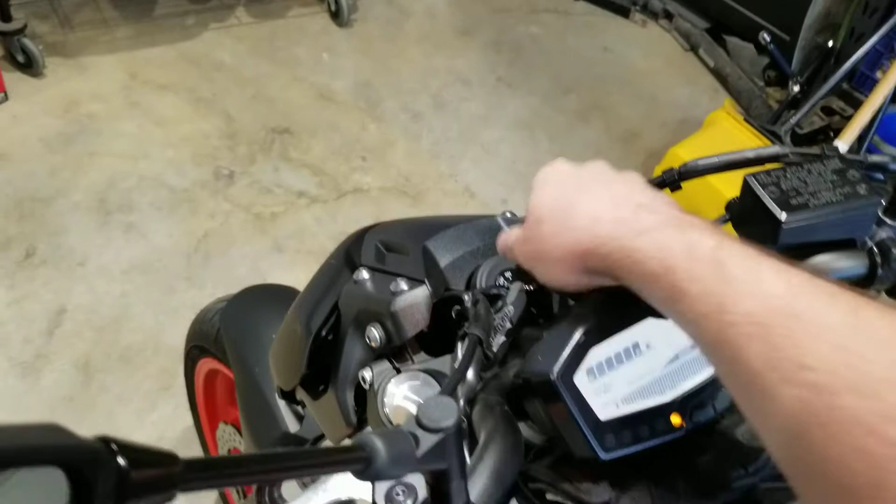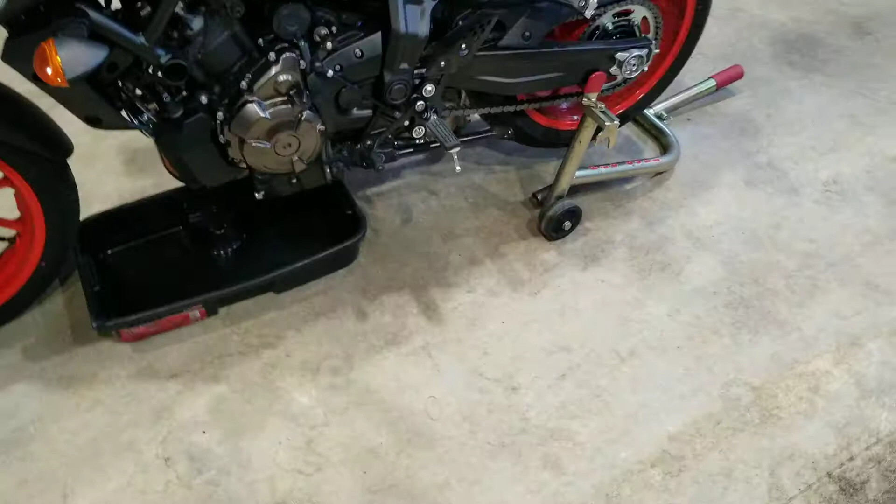Alright, it's time for the first oil change on the bike. In the past week or so, got 598 miles on the new FZ. So I'm going to do that chain adjustment today, but first, for this oil change, you don't need a stand for this procedure. I like to put it up there just to keep the bike level. It's just OCD preference. Got the bike up just on the rear stand.

Some of the things you may need. Channel locks, hopefully not. I use that just for the old filter. I know some may cringe at that. Torque wrench for putting the new filter on. I have a K&N 204-1. I think there's a C on it on the part number online. I know some people say they've had failures with K&N oil filters and things like that. I've never had a problem, knock on wood, but that's the filters I like to run.

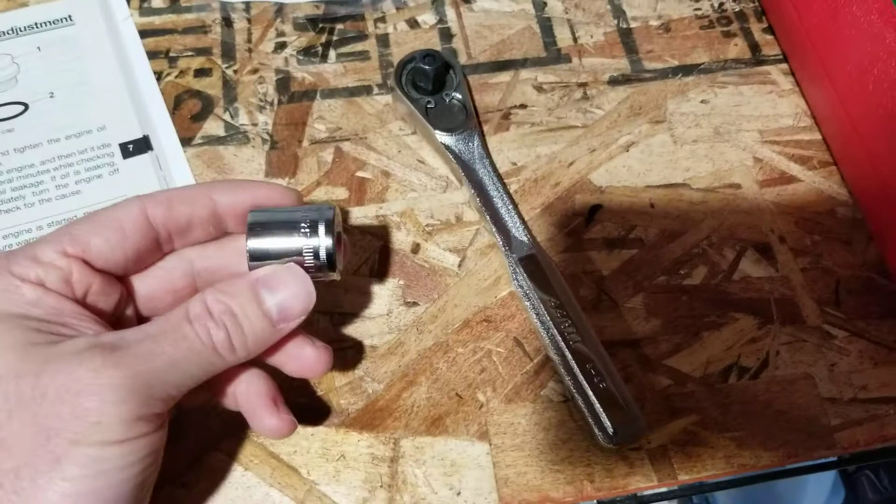I have an OEM crush washer, 3/8 inch ratchet with a 17mm socket. That'll be good for getting the oil drain plug off and on, and then also putting the new K&N filter on if that's what you're running. Got the little booklet here that came with the bike. Got some gloves, and let's get to it.

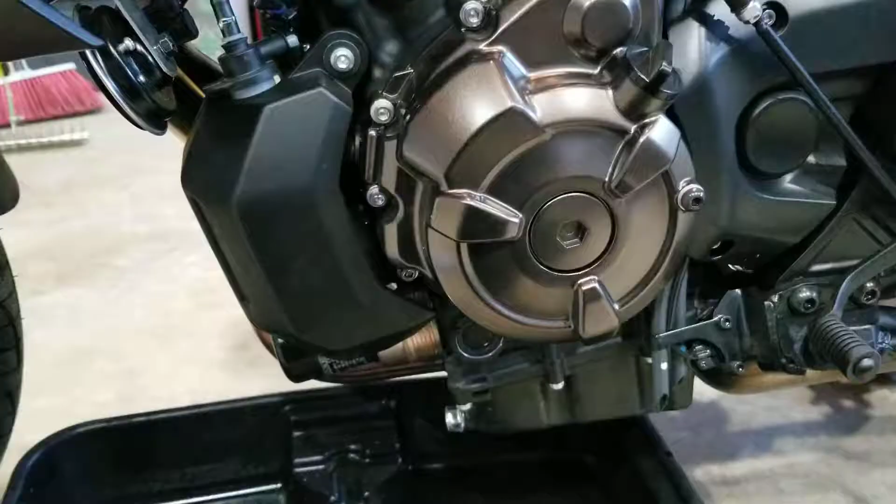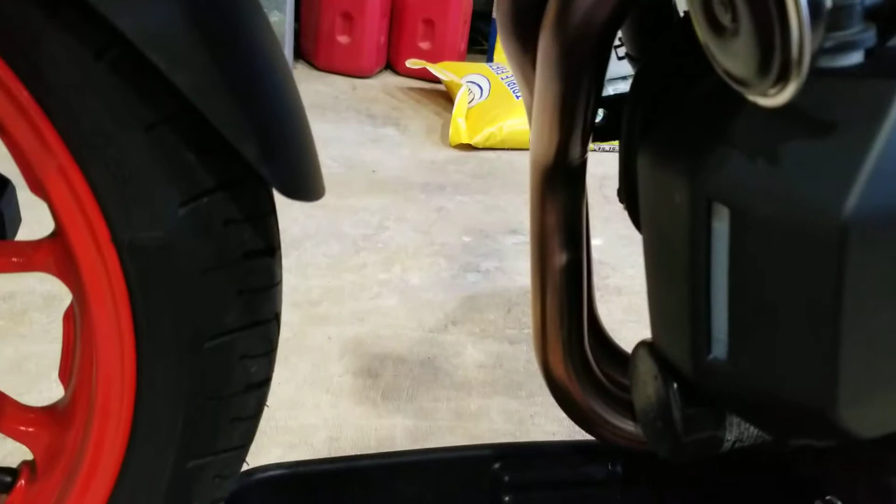Alright, so just as with all of the other 3 million how to change oil videos on YouTube, I want to make sure your bike is warm. I just rode home 35 minutes, so the bike's nice and hot. Let's see if we can't get this open. Oh, okay. So here's your oil filler cap. Put that down in a clean place. Then you can move on down here. This is your oil drain bolt here.

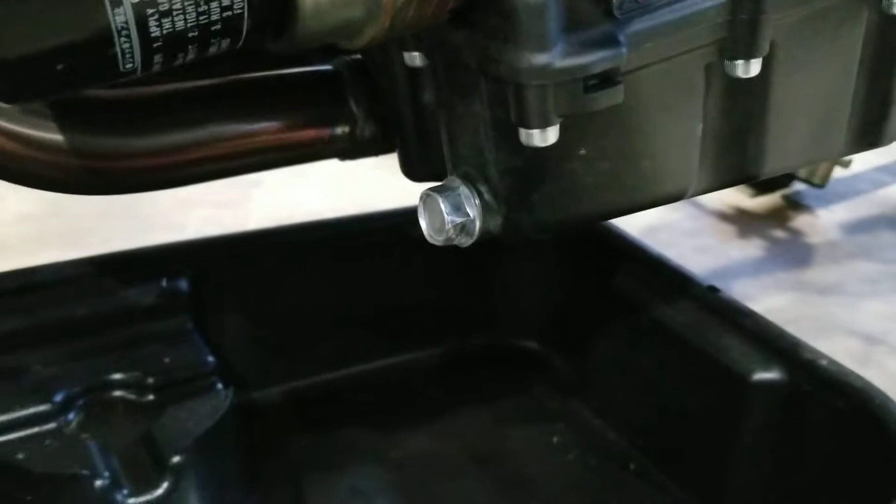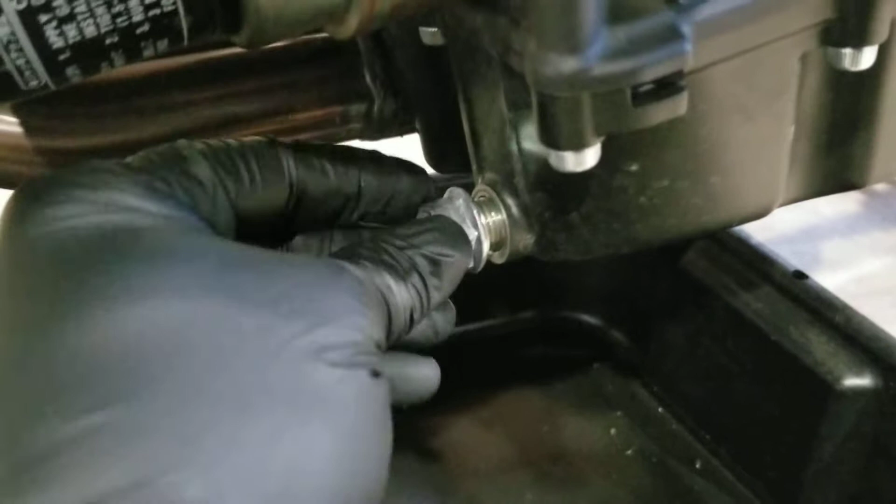Voila. Off camera, I just broke it loose real quick. That little 3/8 ratchet that I had was not doing it. I actually had to break out the breaker bar, and I'm sure it was well past torque, but man, that thing was on there tight. So it might take a little bit of wrenching. It's from the factory like that. But after you break it loose, just go ahead and untwist that. If you hold a little pressure, kind of pushing it back that way as you're threading it out, it might make this next step a little bit easier. Careful, it also is pretty warm.

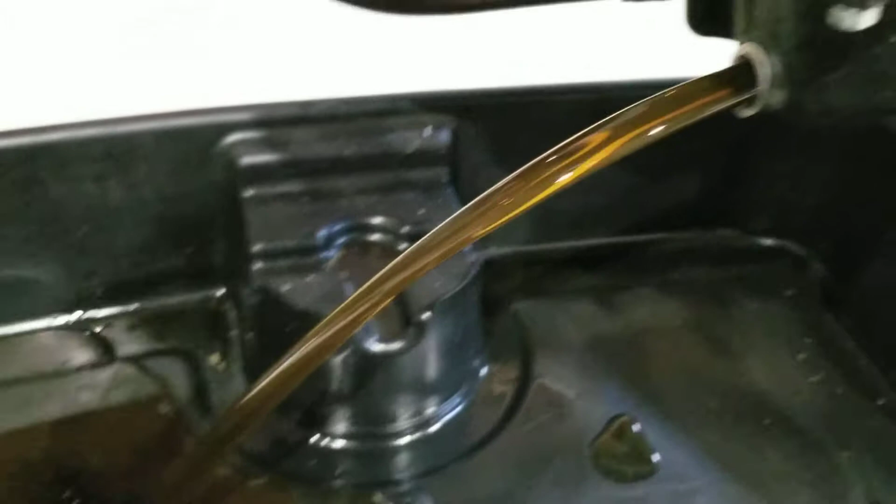So, you got a couple of drips there, and since this is the first change, looking for just the consistency and any particles and things that come out of the oil, just for my own knowledge. Probably not a whole lot to do about it just yet, but still holding a little rearward pressure on it. Once I feel it kind of bouncing off the bottom threads there, just like that, got it real quick pulled away. And all right, we got the pan in the right place. It didn't shoot out all over the garage floor.

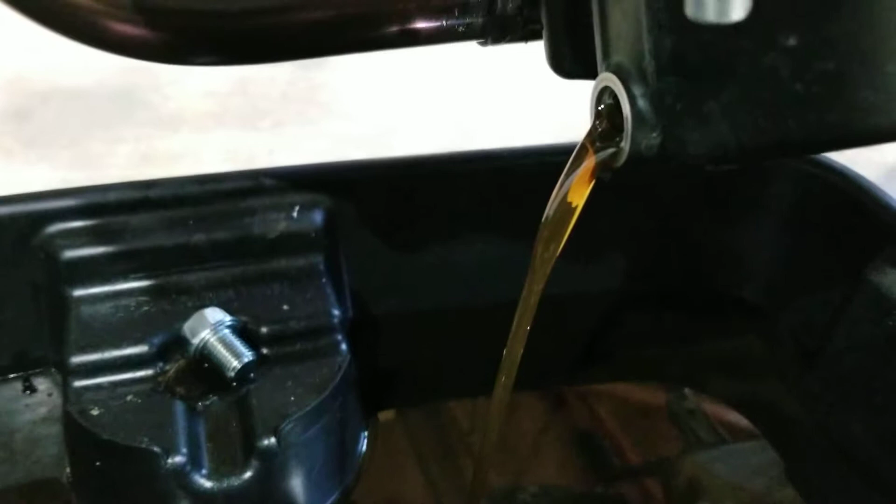So, looks pretty good. I mean, it's only 600 mile oil, but being the first one, it doesn't look like there's any big chunks of anything coming out. Which I would hope not. It's a brand new bike, but I'm sure it's happened. So, gonna do that and get to this next step on removing the filter.

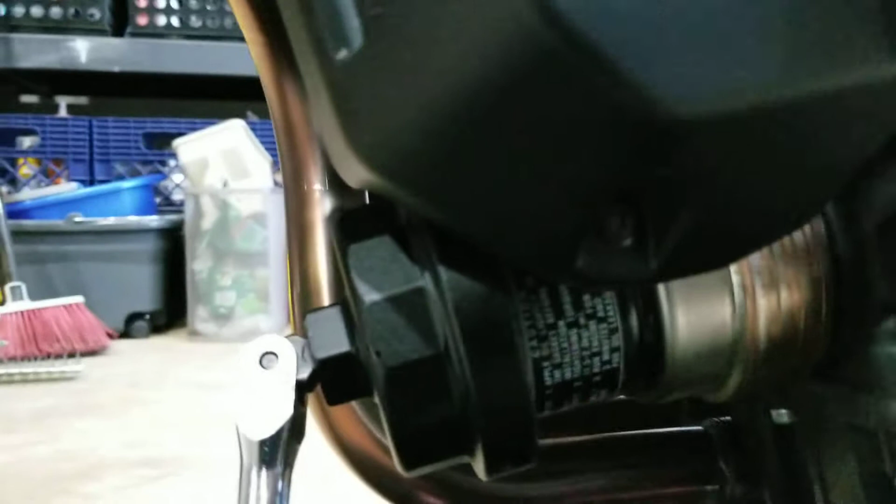Alright, so off camera, I tried to use just brute strength and my hands to break that filter loose, but apparently I'm just not strong enough. So I do have a pair of channel locks that we might try, but I think this oil filter cap wrench is off of an old Tundra that I had, so we'll see if we can't turn it. And oh, thank goodness. There's all kinds of tricks for getting stuck filters off, but thankfully that one just worked. So, come on.

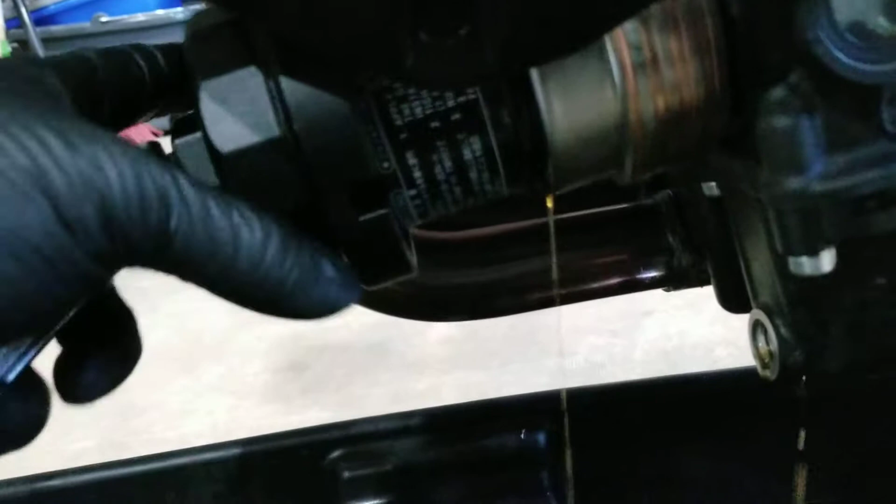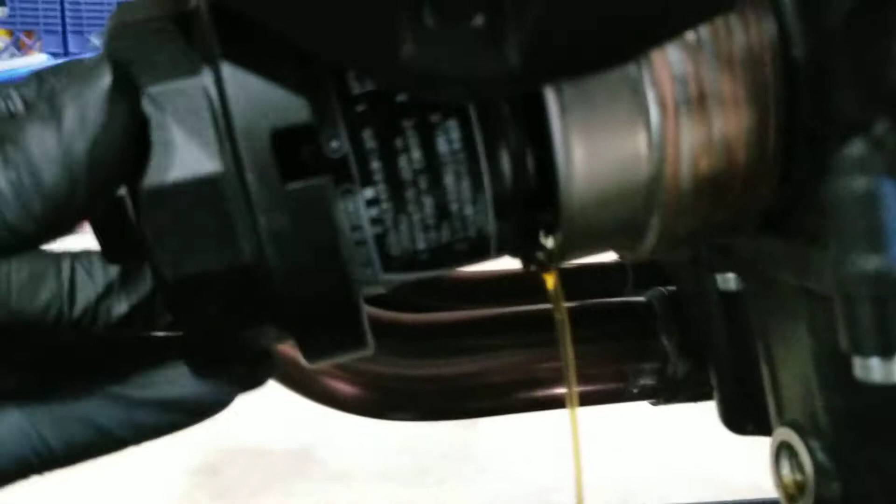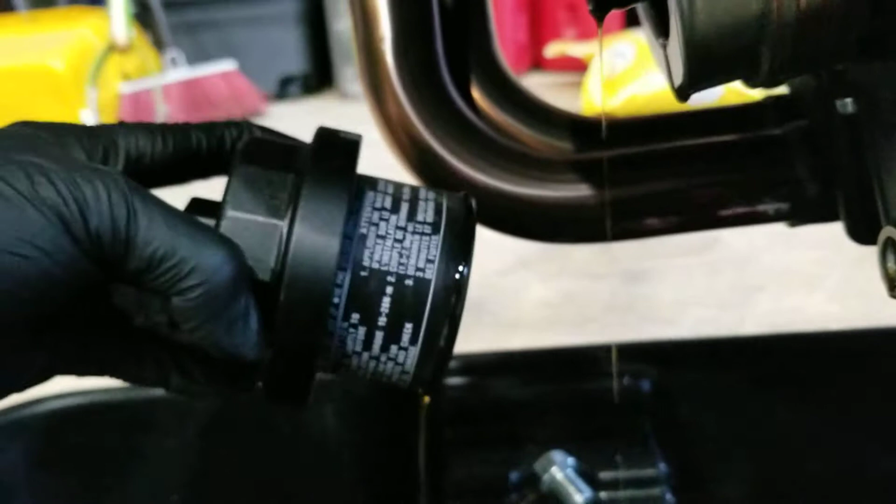So again, let's see if we can't focus this a little bit better. Just like with the oil drain plug, as you're unscrewing it, these filters usually have quite a few threads, or finely threaded. If you just hold a little bit of rearward pressure and let it drain a little bit. And you still have more in the filter as well. So we'll just stack that there for right meow.

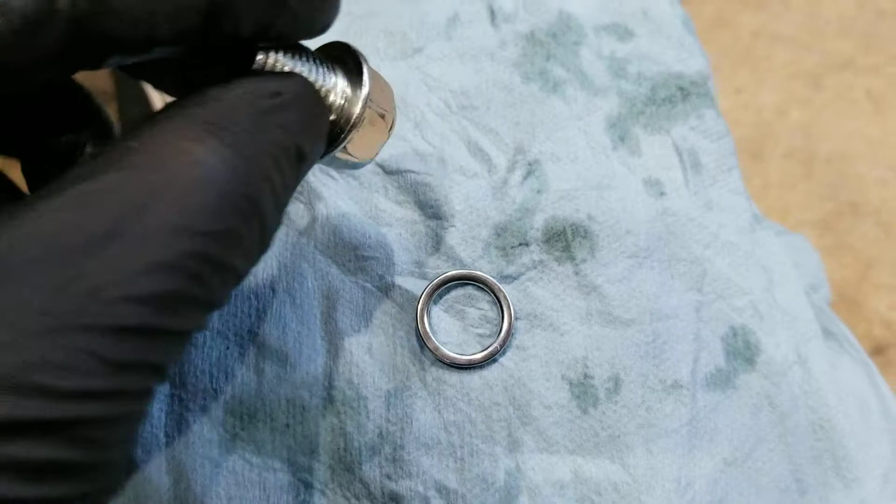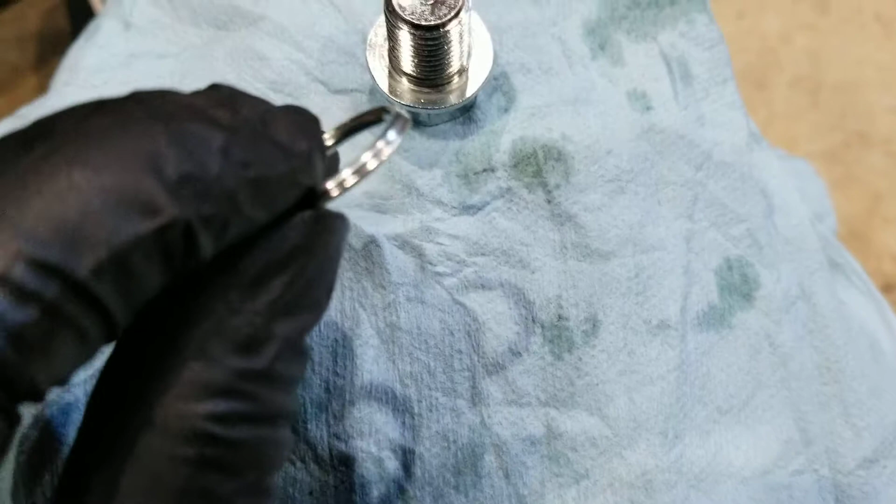Alright, so as that oil is finishing draining out, just be patient with it. Give it 5-10 minutes and try to get as much of that old oil out as you can. In the meantime, I like to go ahead and take my oil drain bolt, dry it off, clean it up, make things nice and shiny before you put it back together. I've already taken off the old crush washer, but as you'll see, there's two different sides. There's one that has a profile to it, some little ridges and whatnot, and the other side is smooth.

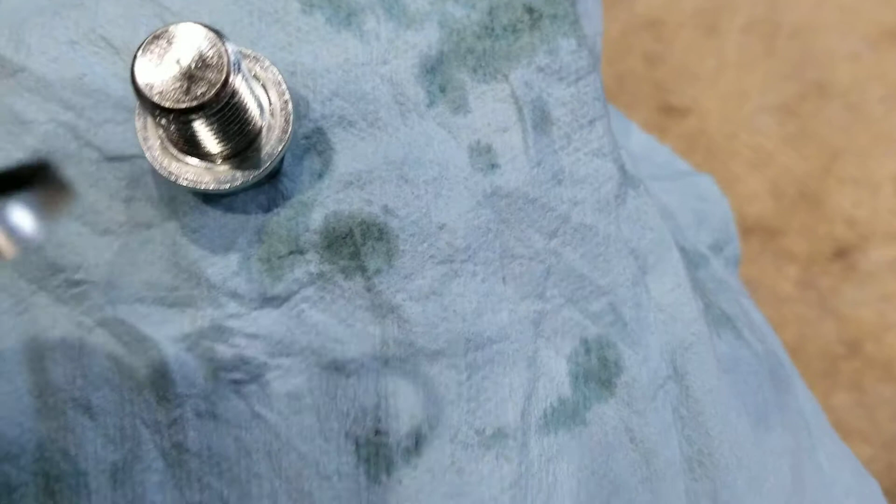The smooth side goes against the oil pan. So I'll go ahead and place that with the side that has the profile facing, oh wait, hang on, scratch that. So the side that gets crushed, the side that has the profile, goes down against the face of the bolt, so that the smooth side is going up against the oil pan here. So I'll just go ahead, let's try pointing it up just a little bit. I have a knack for cross-threading things, so I'll spin it counterclockwise until I feel it seat.

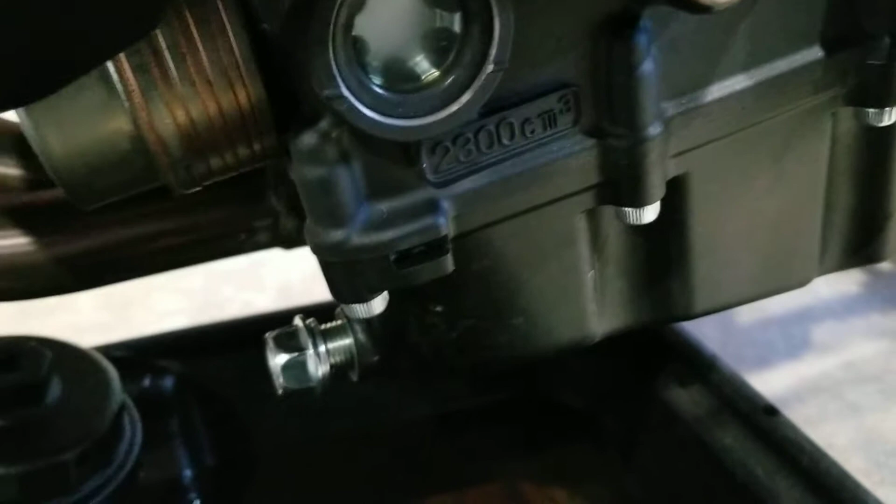And then I'll go ahead and start to thread it in. Before I go much further, I'm pretty OCD about making sure things are clean as you're going back in. So I'll start to clean this up just around here, so I have good clean surfaces between everything. And I dunked my towel in the oil. So I'll just go ahead and finish threading that in. I'm going to come back in just a minute and torque that down.

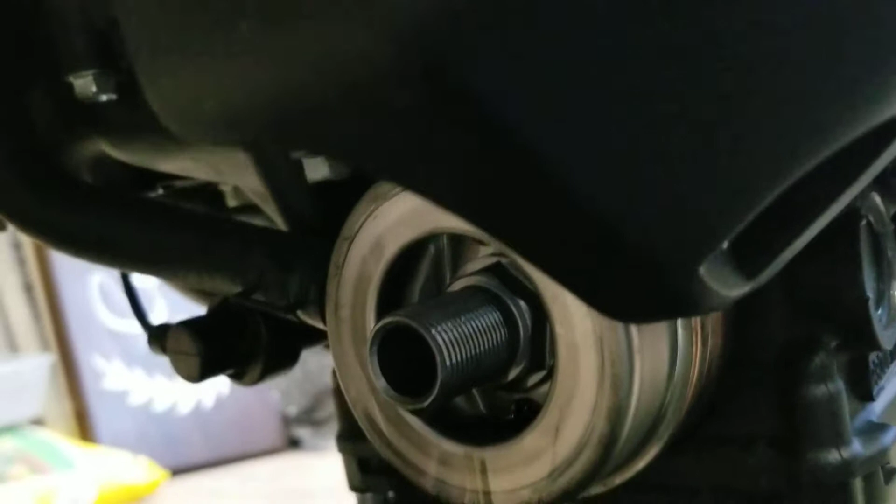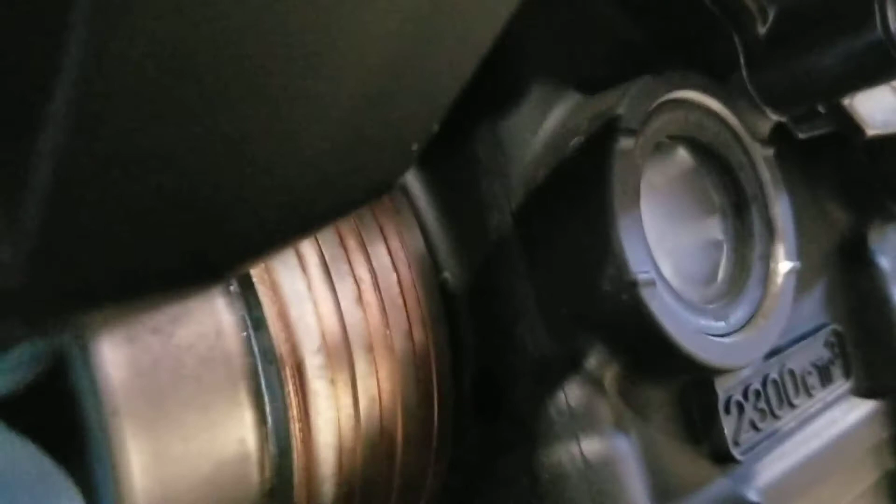Alright, so in preparation for the new filter, again, I just like to take my shop towel, clean up the mating surface there between the filter and the engine. Apparently I'm not very coordinated. Just like to clean it up, make sure everything's nice and clean. Get clean mating surfaces for everything. Looks pretty good there, I'm happy with that.

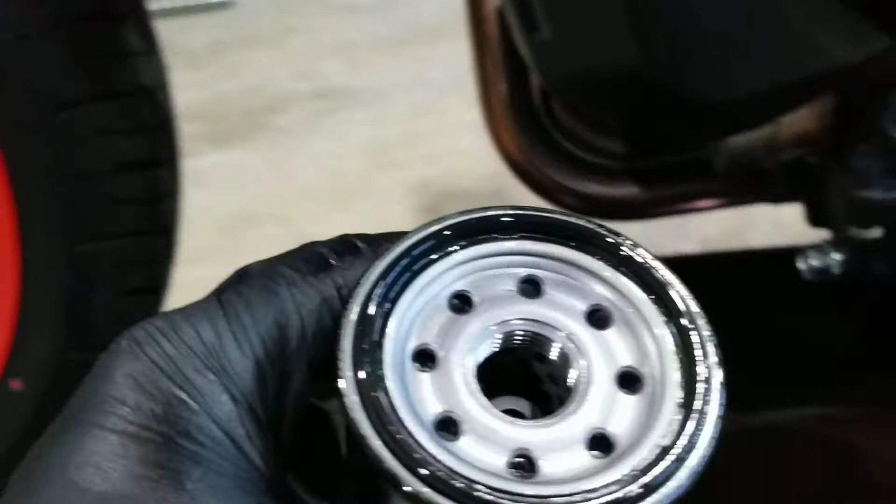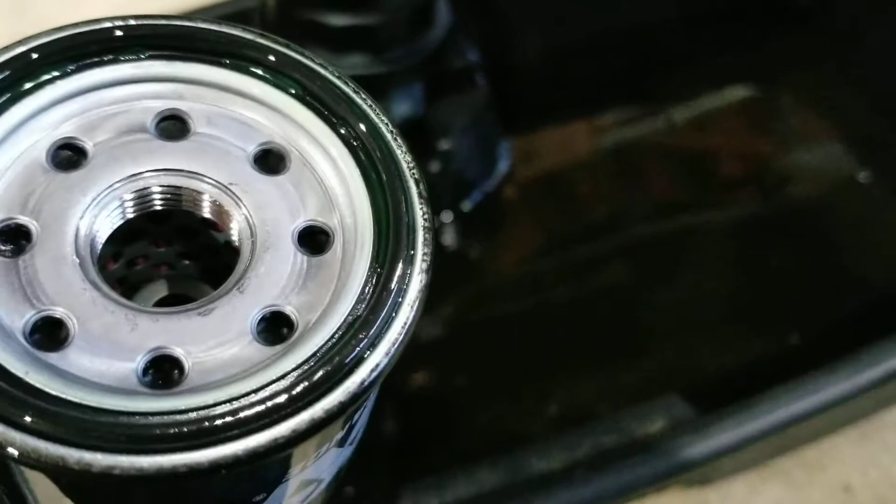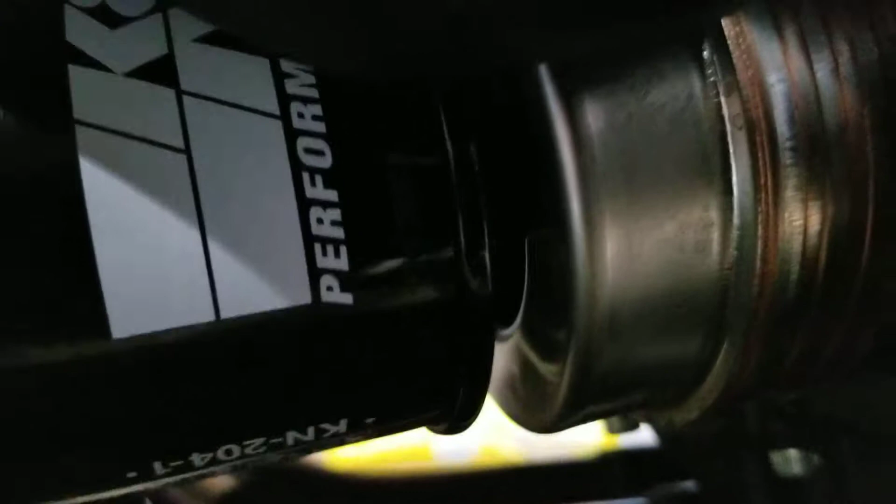Got my new filter here. I put a little bit of the new engine oil on the gasket. Some people just take a dip out of the old oil there, but I've got the new oil here, so a little bit of oil on the gasket there. And again, just to avoid cross-threading things, I turn it counterclockwise a little bit until I feel it seat, and then I'll go ahead and spin it the rest of the way on. Voila.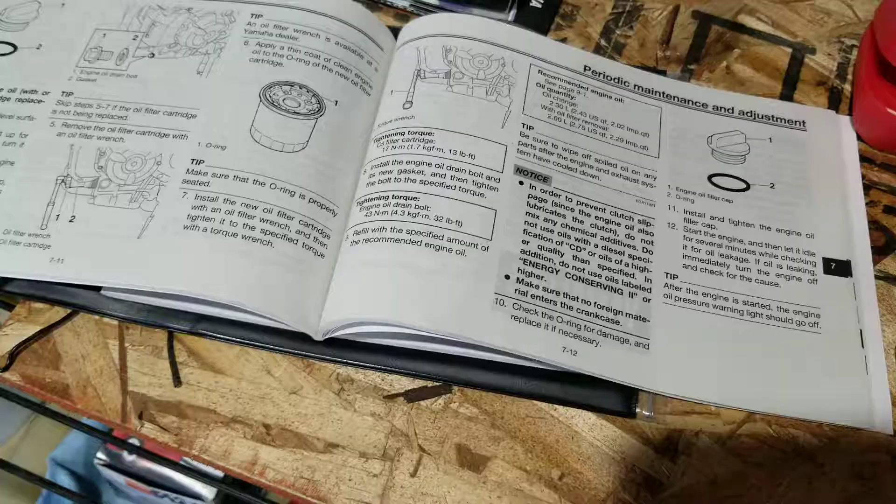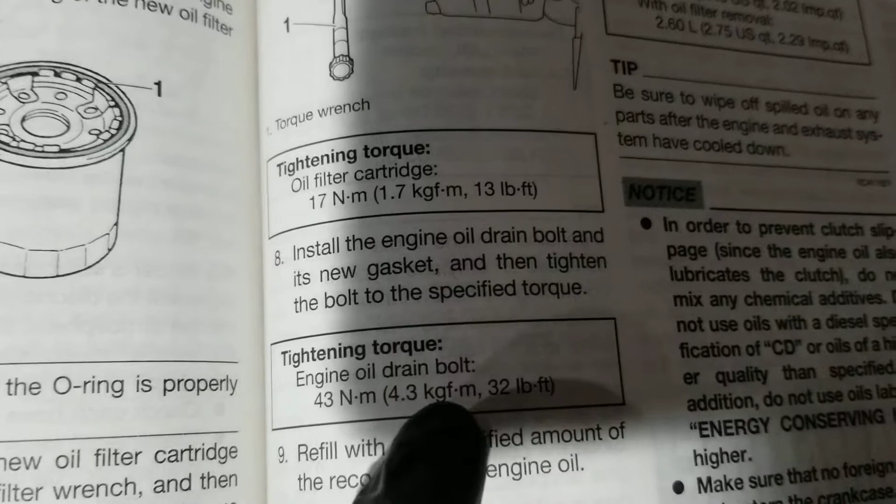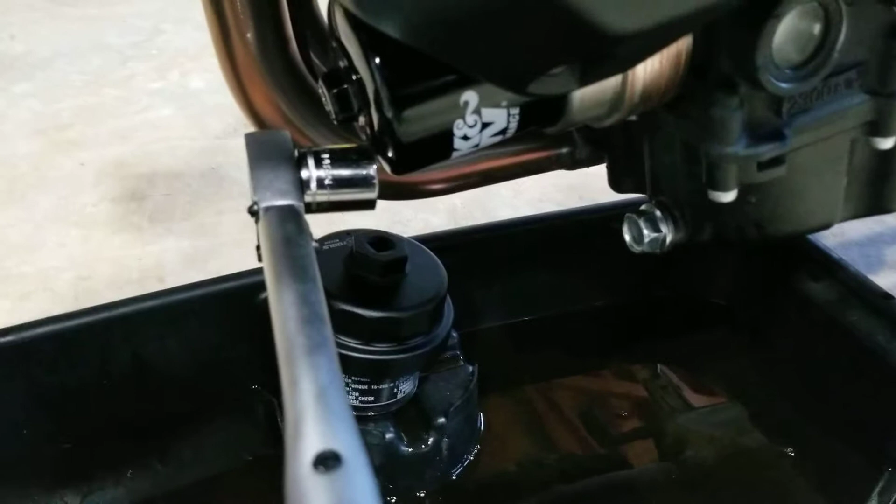Now it's time for our handy dandy torque wrench. It looks like we've got on the oil filter 13 pound-feet, and for the engine oil drain bolt it's 32 pound-feet. So doesn't matter which one you do, just make sure you get the right values on the right component. So 13 pound-feet for the cartridge, the oil filter, and 32 pound-feet for the oil drain bolt.

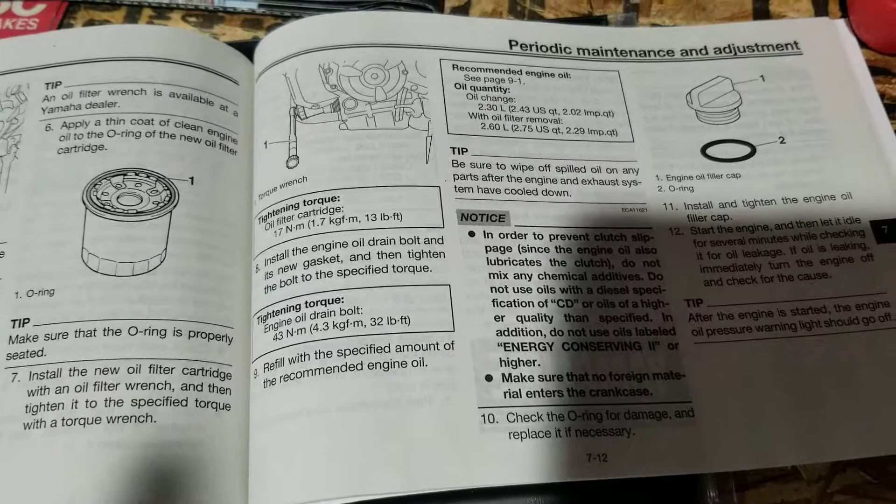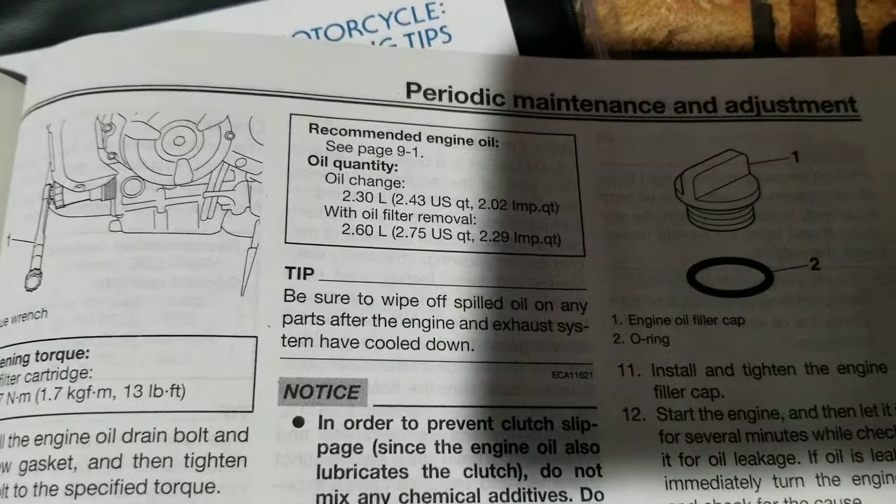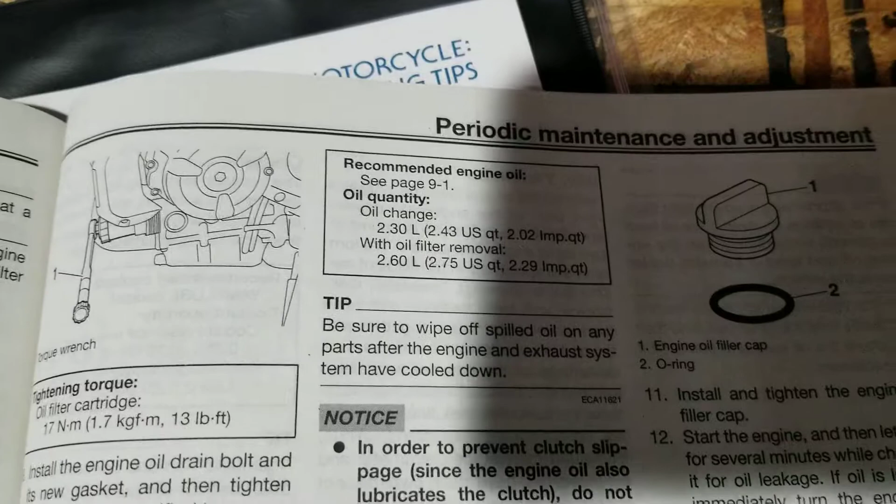Alright, so you're almost there. We've torqued down the engine oil drain bolt, torqued down the engine oil filter. Now it's time to fill it up. Gives you two different quantities here. They give you a quantity of oil if you don't change the filter. My personal thing is I always just change the filter when I'm doing the oil. The K&N filter, even the fancy one, it's $8, $9, something like that. So we'll be using the other value here, which is 2.6 liters with oil filter removal.

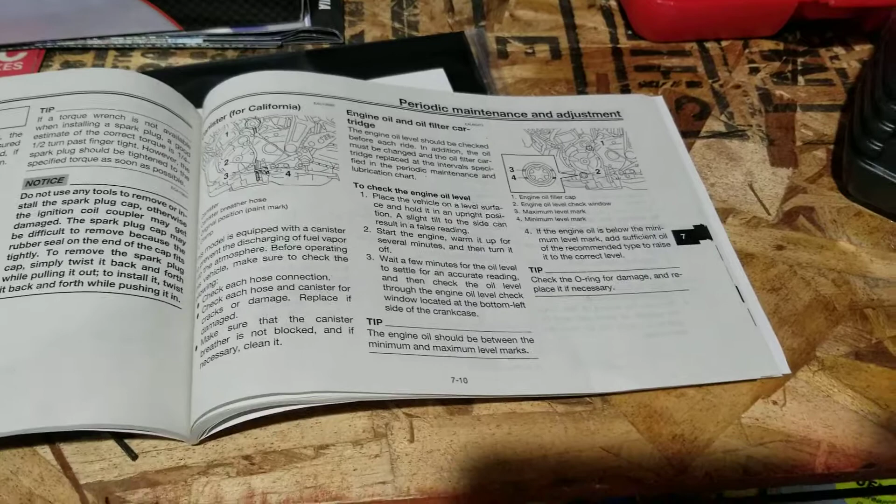There's another chart, is it next page? Somewhere in here. It'll tell you the different types, weights of oils that you can use based off of the temperatures that you're normally riding in. For me and my use, I'll be using the 10W40. Probably waste money on this green stuff, but it makes me feel better about myself.

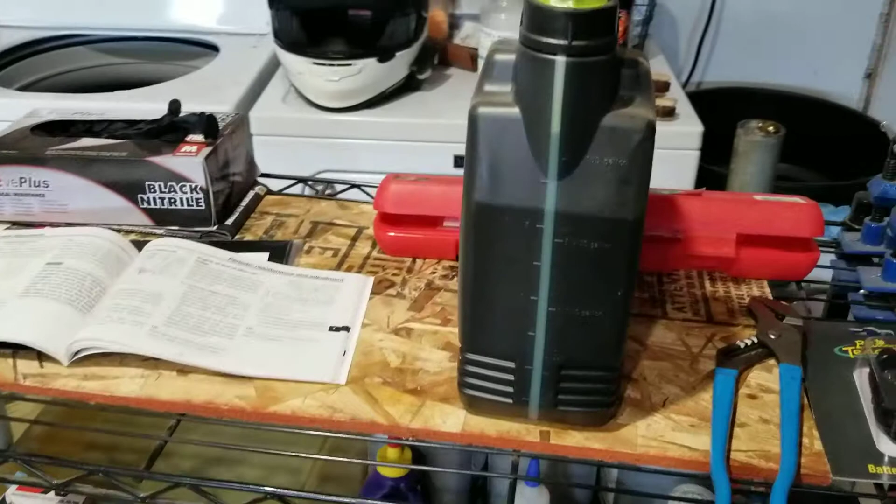So on here, since we're doing 2.6 liters, I'll probably back up a little bit. Probably start with 2.5 liters, start it up, see where we're at, get the bike back on the ground and sit up, and start with that. I cannot hold up the funnel and pour this at the same time, so I'll be back in just a moment. All right, so we got our 2.5 liters in.

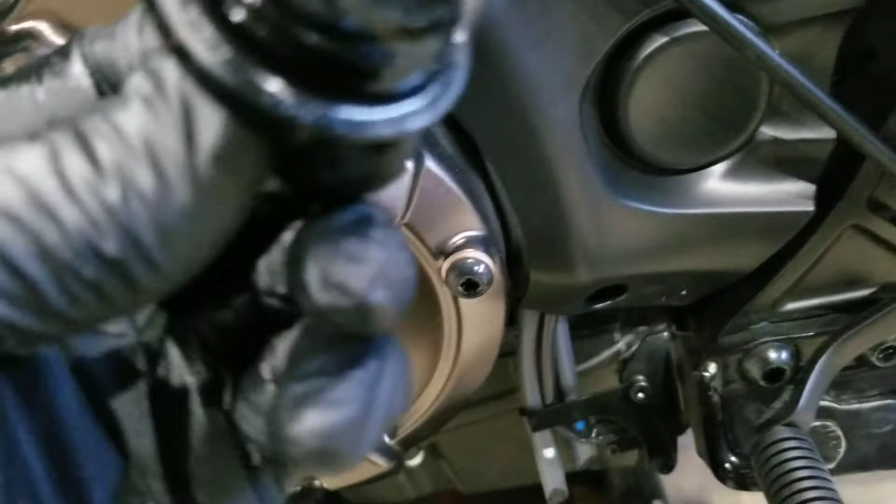And just like with everything else, the name of the game anytime you work on your bike is cleanliness. So again, just a little shop towel, making sure our surfaces are clean, not introducing too much extra bad stuff in there. We've got an intact O-ring still here on our filler cap. I've never had to replace one on the bikes that I've had, but hey, this might be the time. So let's lightly seat that for now.

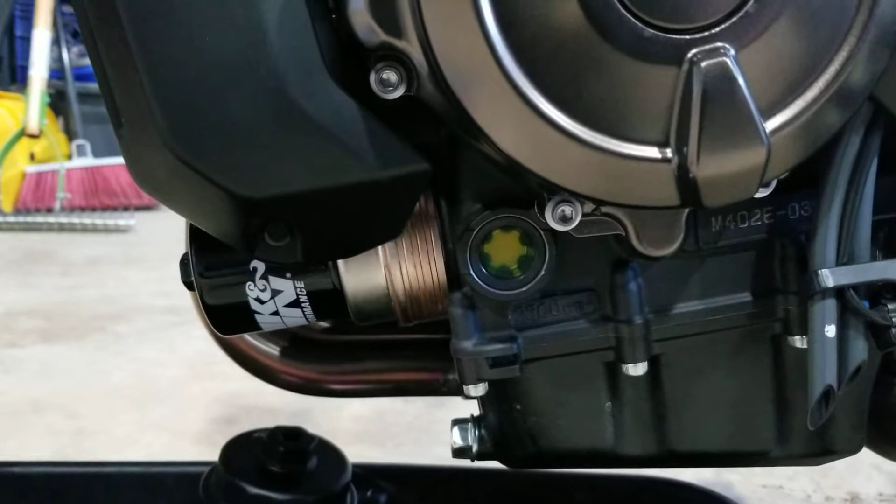Got our oil window, which up here is full right now. We're going to go ahead and start up this bike, let it run for a few minutes, get the engine warm again. That window will probably drop just a little bit as the oil starts circulating through the engine, and I'm looking for any leaks around the oil drain bolt and the filter there. So be right back.

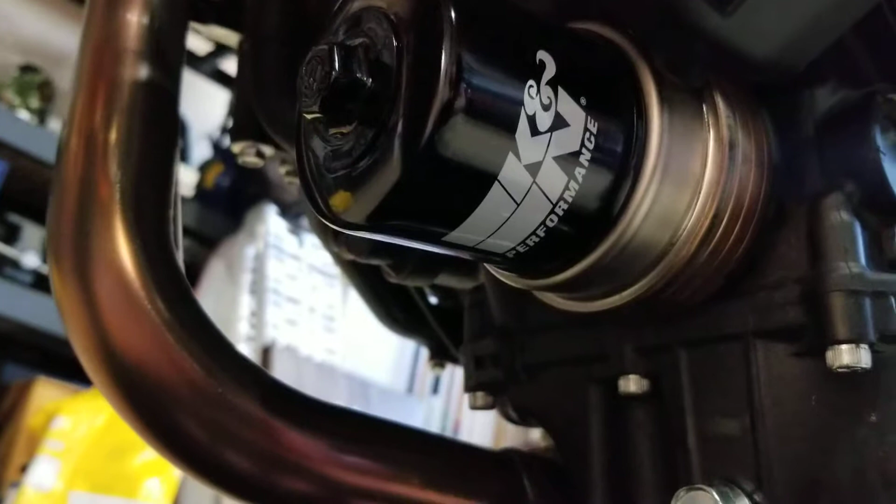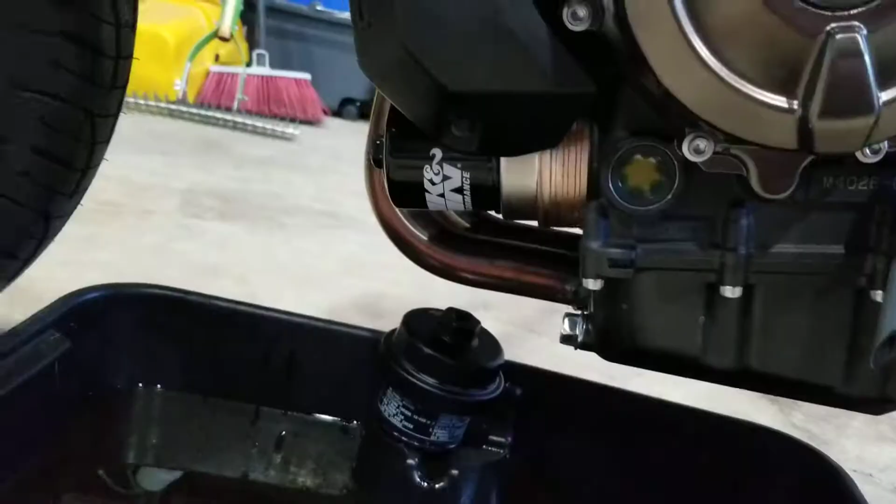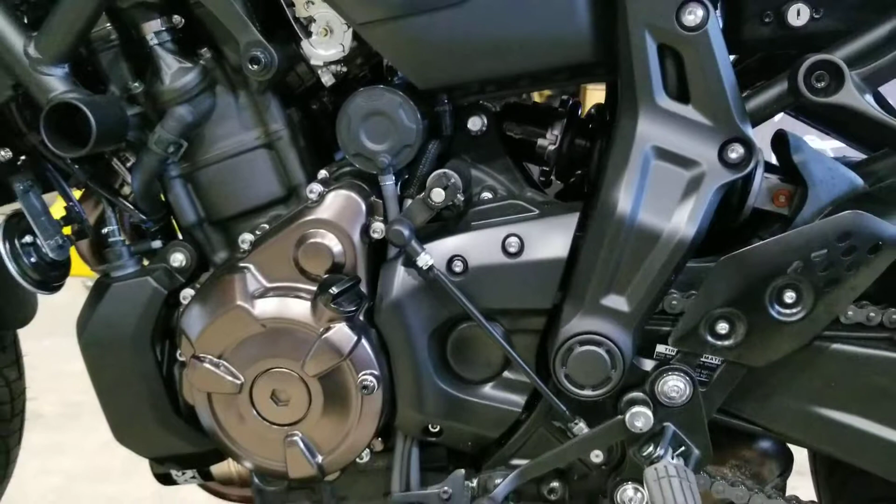Alright, so the bike's been off for about 4 or 5 minutes now, and even going 1/10 of a liter less than what it recommends, we're just about at the upper limit of the oil line here in the oil window. So I'm going to leave it like that for now, and keep that in mind for next time. Maybe put even just a touch less, but I'm happy with that. There were no leaks, no nothing else. So that's pretty much your first oil change right there.

If you've got an AutoZone or something near you, they'll usually do free oil recycling. So every time I go to get oil for my truck or whatever, I'll take that down as I pick up new oil, recycle the old stuff.

So that's an oil change on your MT-07. I'm sure it's exactly the same, if not incredibly similar, on an FZ-07. But on the MT-07, that's your oil change. If you've never worked on a bike before, this is as easy as it gets. If you have worked on another bike before, then maybe consider getting one of these, just because the maintenance is so easy. But that's it.